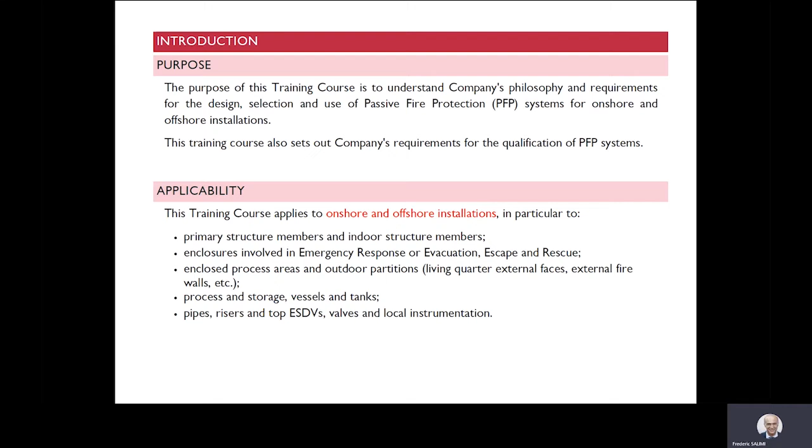So let's see a brief video about what PFP is, and then I'll continue my training.

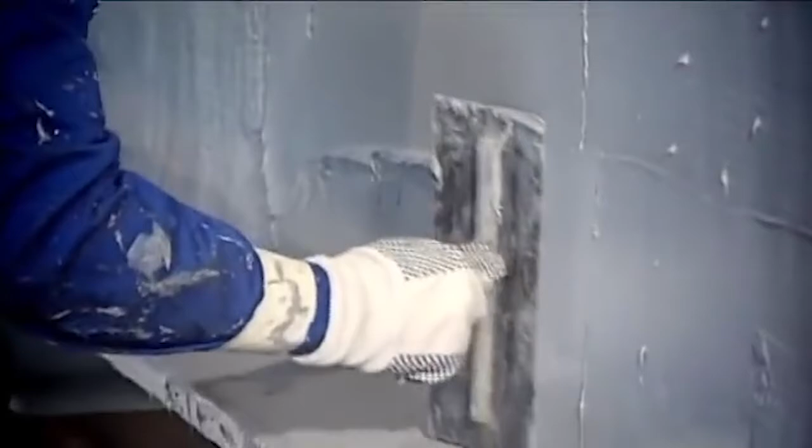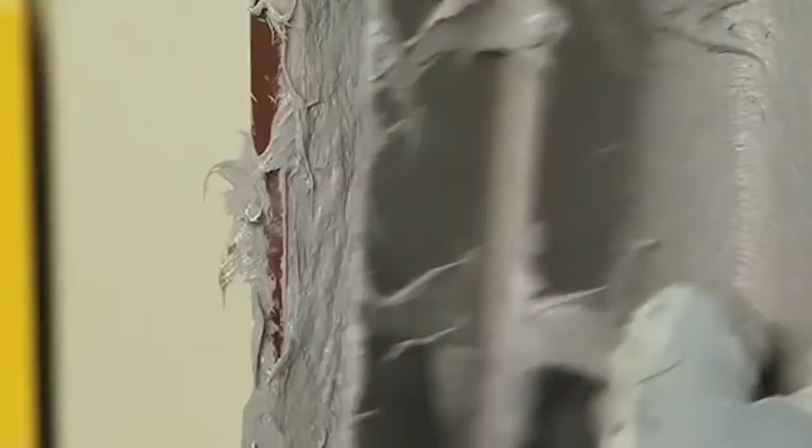This allowed Chartek to further develop its product offer for the onshore oil and gas market. Building on a reputation for long-term fire and corrosion protection, Chartek 1709 was specifically developed to provide optimum performance against the UL 1709 onshore fire test standard. Offering superior performance for hydrocarbon pool fires, reduced mesh requirements and lower loadings, Chartek 1709 greatly reduces installed costs. Chartek products tend to have lower loadings, which is the thicknesses, than other products. So it's a quicker product to apply, and also it's more economical. Durable and lightweight, Chartek 1709 allows off-site application, providing flexibility in build schedules for structural engineers and construction managers.

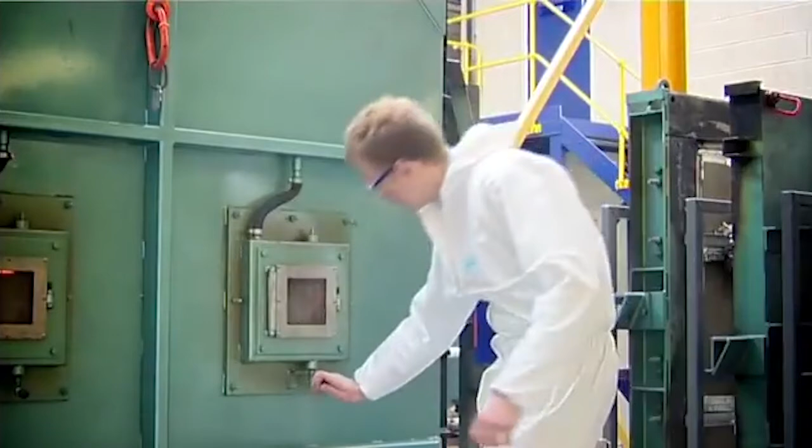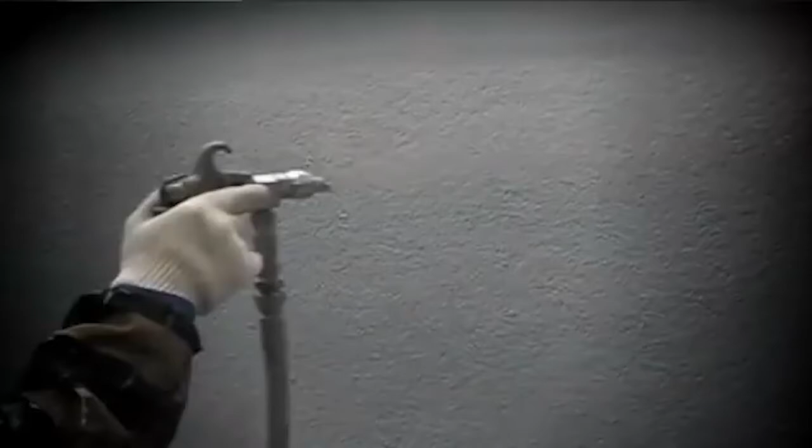In 2004, International's lab in Felling, North East England further expanded its furnace capacity. This ongoing investment into the passive fire protection market led to the introduction of Chartek 8. Specifically designed for hydrocarbon pool fires in offshore environments, with improved performance for divisions, Chartek 8 has no mesh requirements for up to 1 hour and allows applied thicknesses to be minimised, aiding constructability while still providing long-term fire and corrosion protection.

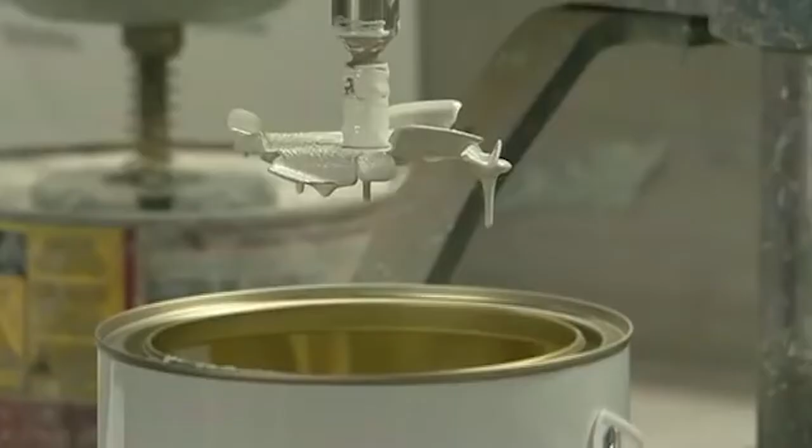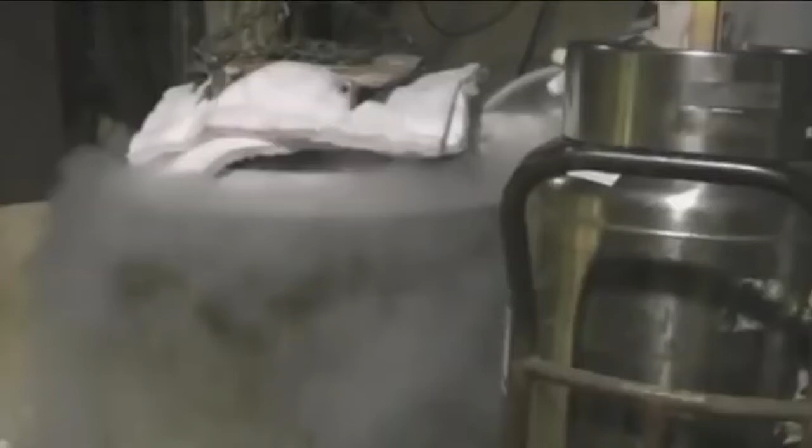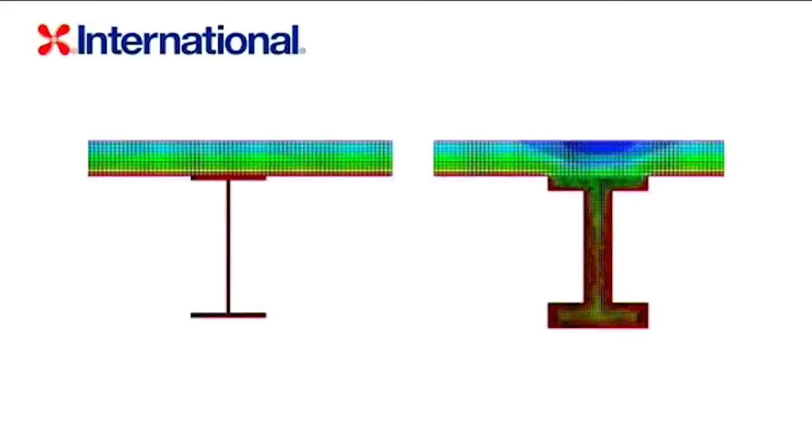In 2008, International recognised the need for greater research into solutions for the fast-growing LNG market. Testing showed that by using International's Intertherm 7050 spray insulation with Chartek as a duplex system, it was possible to provide fire protection and mitigate against the dangers of cryogenic spill, which can result in steel embrittlement. Working in these areas, it became apparent that oil and gas customers had an increasing need for complete fire engineering solutions, which assessed and computer-modelled the particular requirements of ever more complex projects.

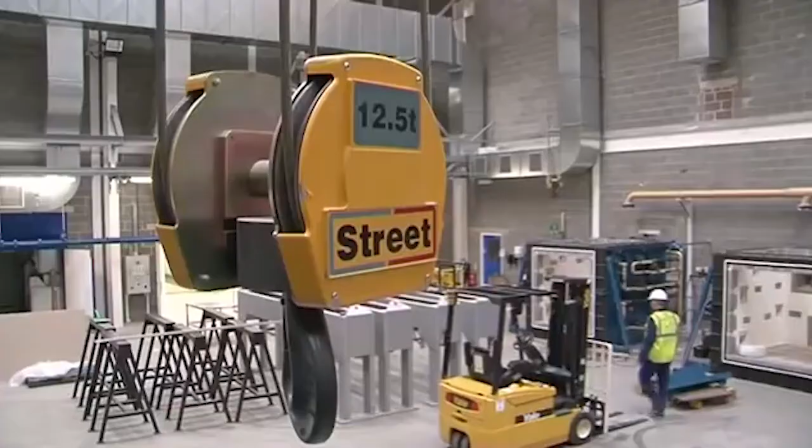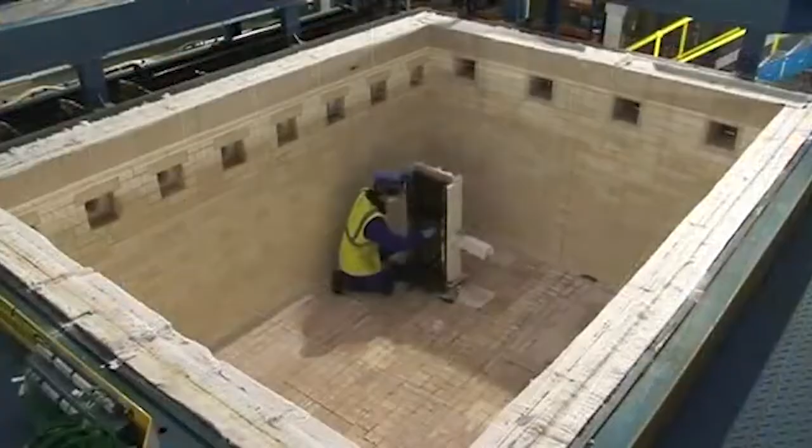In response to this, International formed its fire engineering team, a group dedicated to overcoming fire protection problems faced by its customers. Fire protection was also incorporated into Interplan, a tool which provides a predictive assessment of when in-situ fire protection systems need to be refurbished. 2011 sees International making massive investment in its passive fire protection R&D capability. The opening of a €7 million fire protection lab at the UK Felling site demonstrates International's commitment to the passive fire protection market.

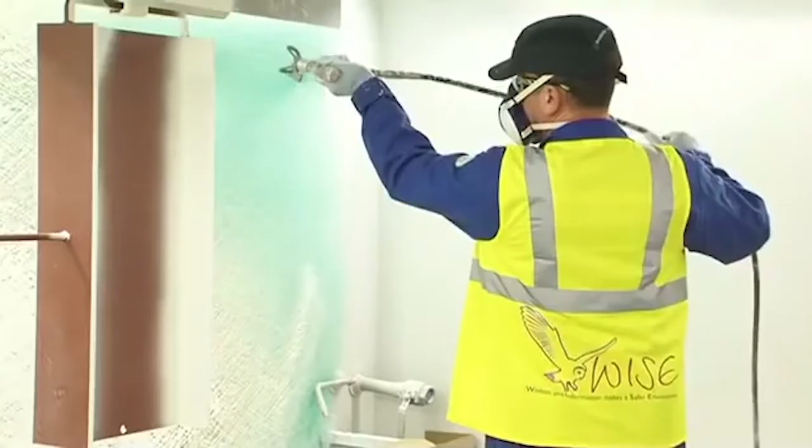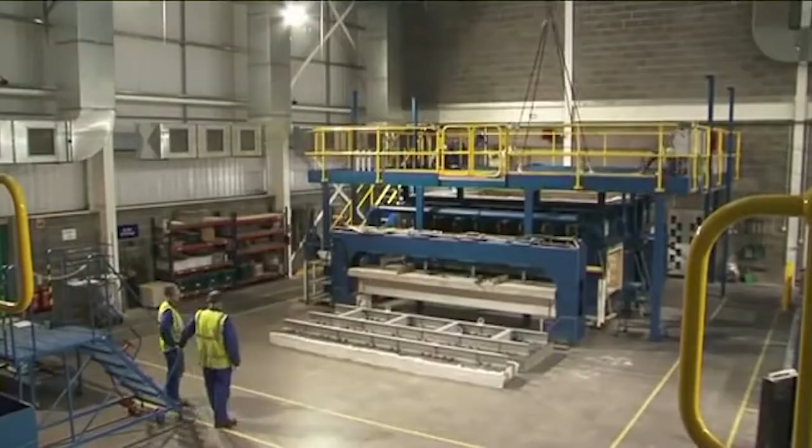With 5 furnaces capable of carrying out a range of loaded and unloaded tests, dedicated application areas and state-of-the-art R&D labs, the new facility will support further development of International's complete fire engineering approach, delivering services and products tested to meet the high standards the industry expects. With unrivaled heritage, facilities, and most importantly, people, Chartek continues to lead the market towards safer, more efficient fireproofing solutions.

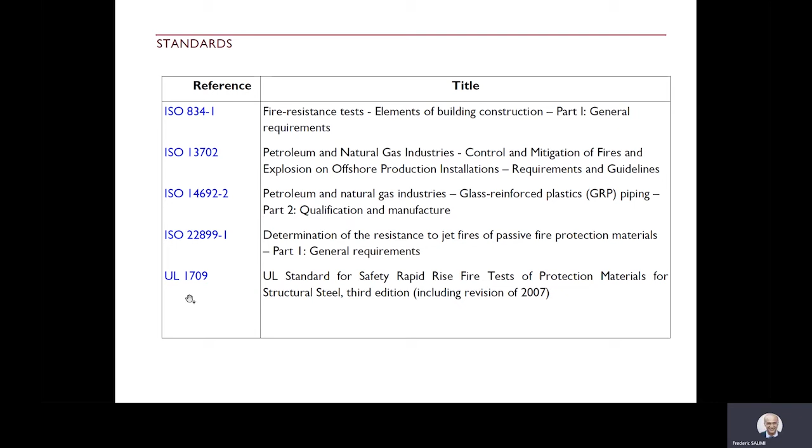Briefly, the standards about passive fire protection. There are certain things about ISO, UL, API, IMO, NFPA 33, NORSOK and others, and SOLAS, where you can get more information about PFP for the installation.

So the general requirement for passive fire protection: the aim is to minimize the spread of fire, its duration, the damage caused, and more specifically, safety to life. Safety to life is to protect personnel on the installation against hydrocarbon fire and jet fire, and to protect parts of the escape routes, evacuation and rescue means as necessary.

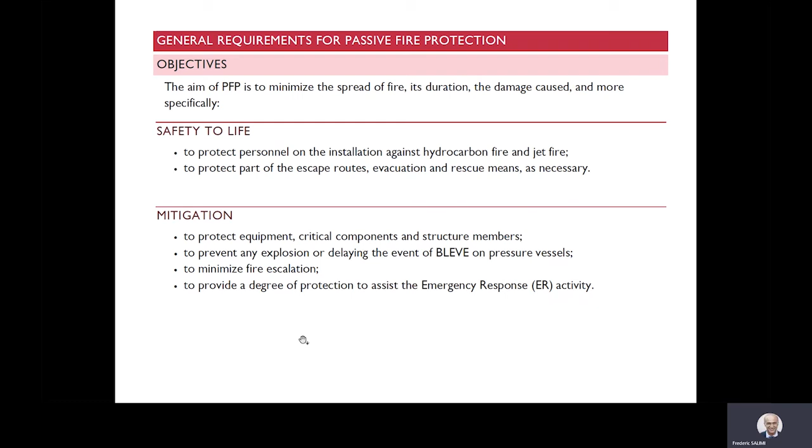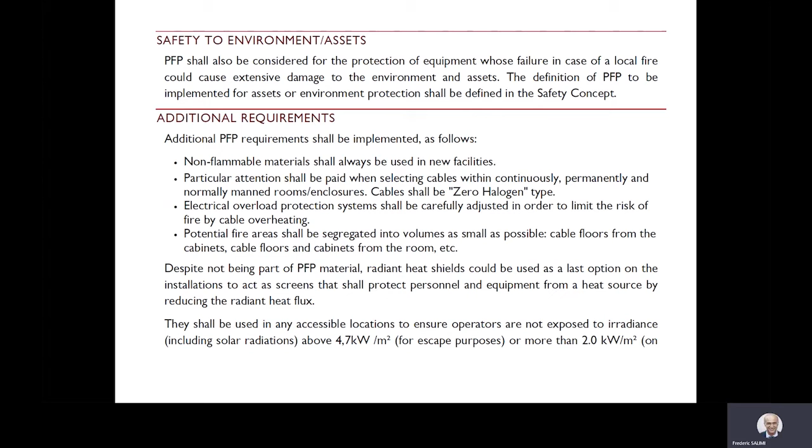Mitigation is to protect equipment, critical elements and structural members, to protect against explosion and delay the event of BLEVE on pressure vessels, to minimize fire escalation, and to provide a degree of protection to assist emergency response activities. Additionally, these are the safety to environment and asset. So all of these things we will discuss with our client to see what is required for the PFP in their installation.

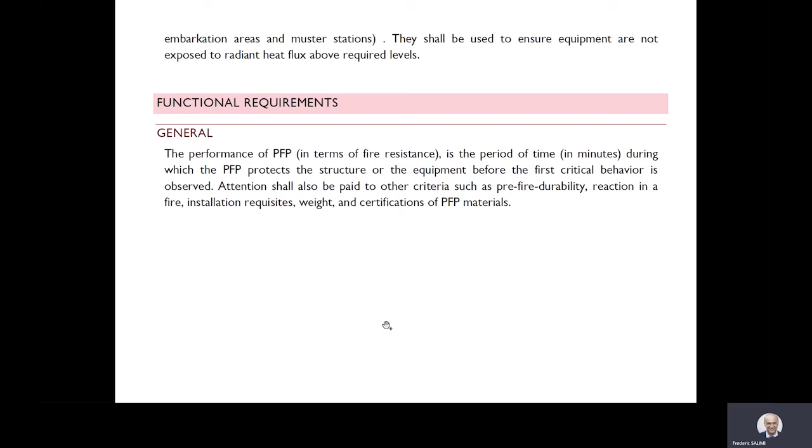And the functional requirement is the performance of PFP in terms of resistance. We will discuss this as the period of time in minutes during which PFP protects the structure before the first critical behavior is observed. This we call the PFP rating, and we will look at your philosophies and studies, and then we come up with something that is applicable for your project.

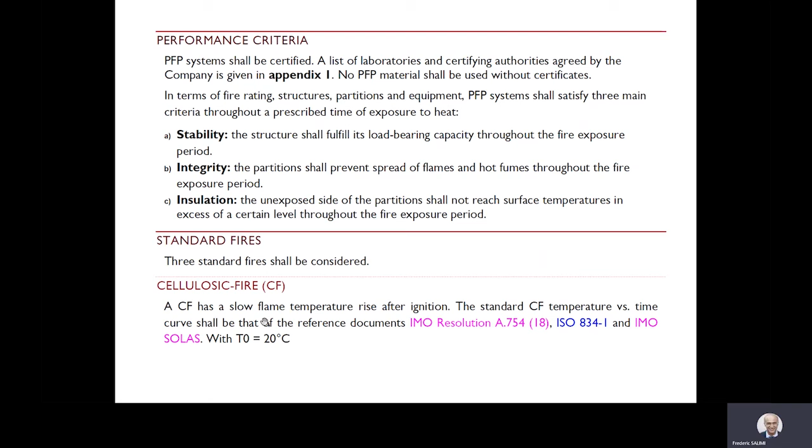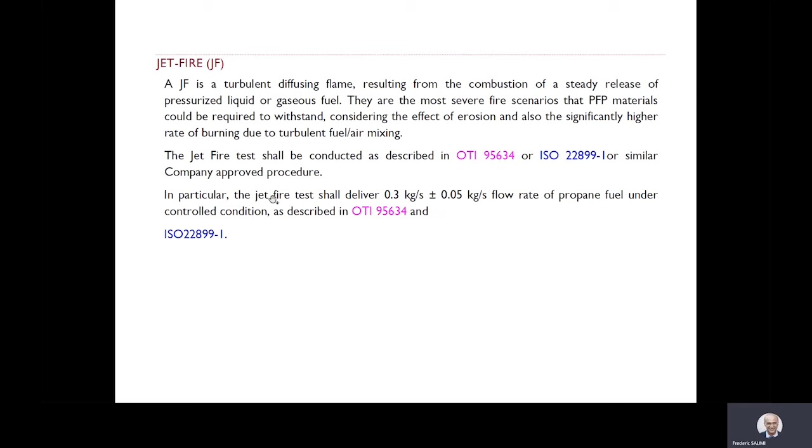Performance criteria: we discuss the performance criteria about stability, integrity, and insulation. And we use 3 standard fires. There is cellulosic fire, we have hydrocarbon fire, which we call HF, and jet fire, which we call JF. So here we give the names of the tests and certificates in different countries.

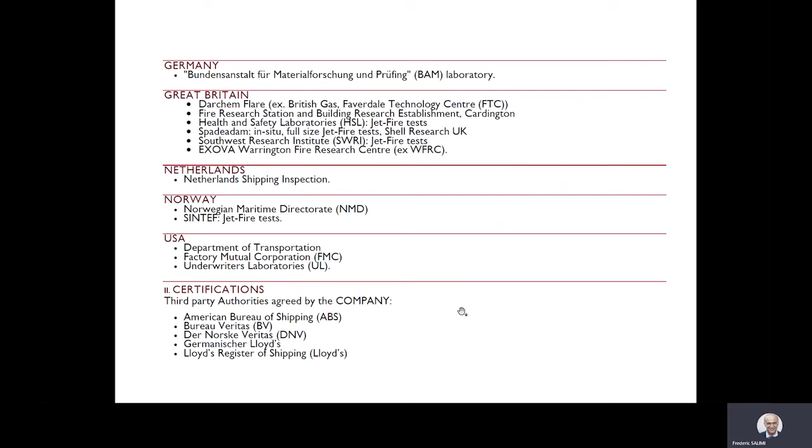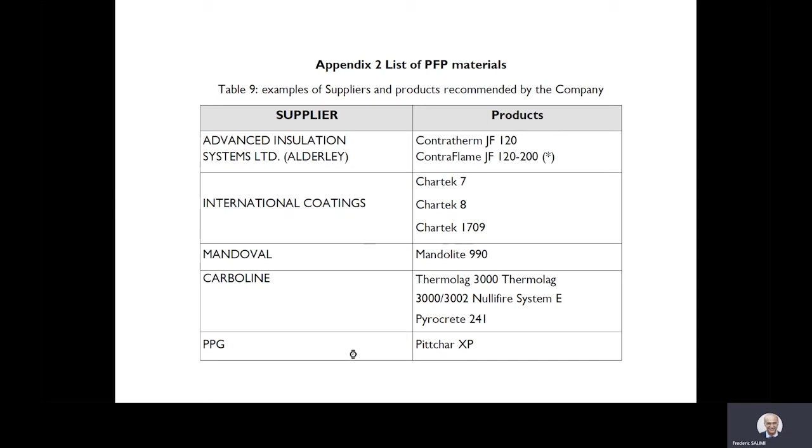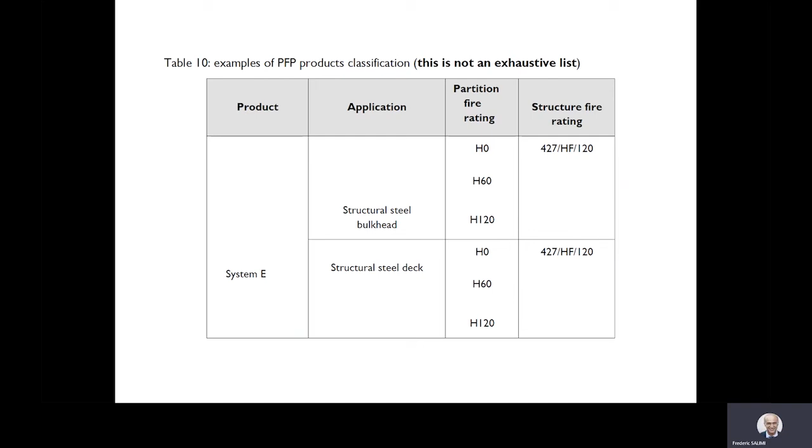And finally, we can look at the list of PFP materials from the different vendors, and we discuss with the company which type of product they use for their installation. And also we give examples of PFP product classification. For example, when we say H60, that means it resists a 60-minute hydrocarbon pool fire. H120 is 2 hours. So these are all temperature, hydrocarbon, and duration. For example, this is JF, meaning jet fire, for 350 and 30 minutes.

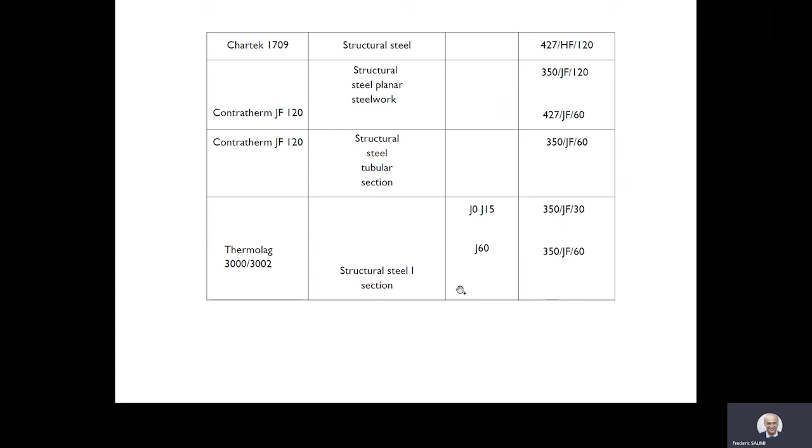So the requirements for the duration we define later when we see your installation, based on risk assessment and what you have, whether it is okay or not. So these are the typical examples that we look at in your installation.

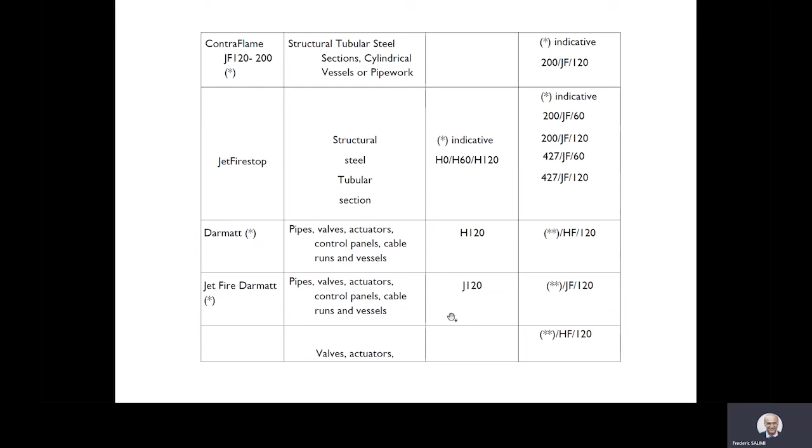When the approved e-course is finalized, we will send it to the company employees, and the company employees will have the possibility to schedule a meeting with the ADEPP Academy experts. And after 1 year and a successful interview, the personnel will get the certificate of passive fire protection skill.